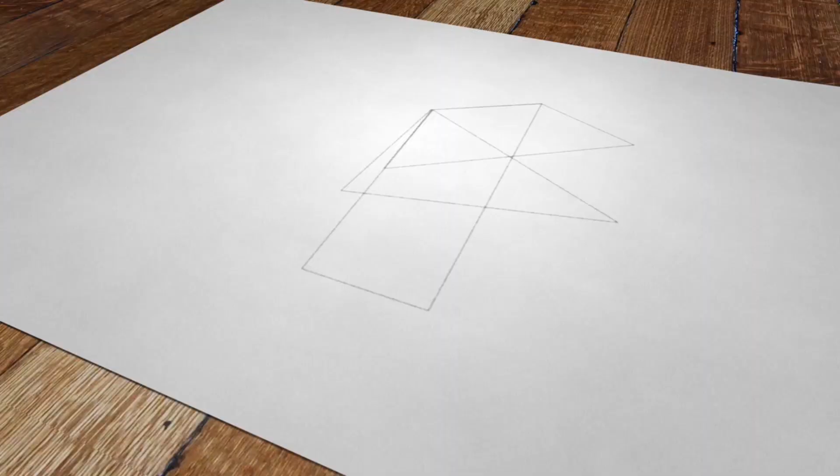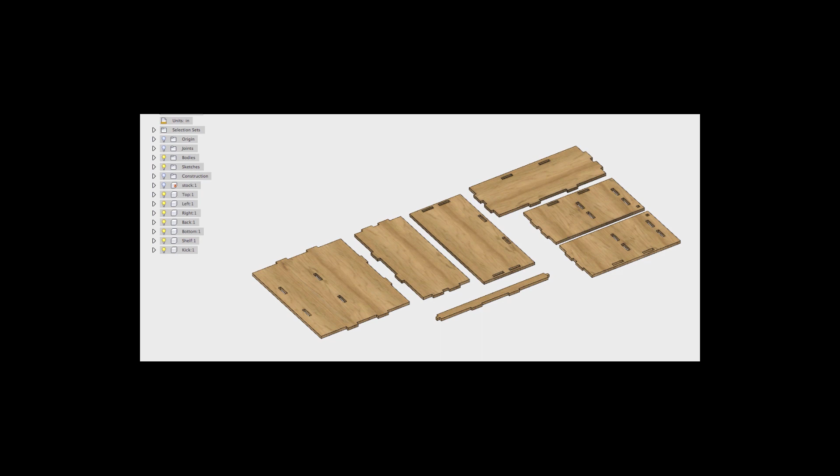Okay, in this tutorial, I'm going to take you guys through creating this bookshelf. We're going to start in Fusion 360 by creating some parameters, set up a sketch, and create a full 3D model. Then we'll show you how to take that 3D model and prepare it for manufacturing by laying all the parts out, putting on some dog bone fillets, setting up your CAM to create G-code, simulating that, loading it all up into the ShopBot, cutting it out, and finishing it up to create the final product.

So here in Fusion, when you start up, you're always in a new design. If you want to create a new design, you click File, New Design, and now you're in a completely empty project or part or assembly, or whatever you want to call it.

Before we do anything, for a project like this, I first want to create some parameters by pressing the little green plus. For example, the first one and most important is the ply thickness. Let's say I've measured that exactly at 0.725. We want to put this in, and we're going to use this all over the place so that as I develop the design, I'm always referencing this one parameter of ply. So if I go to rerun the job and I measure at 0.735 or whatever, each time I cut a new piece of material, I can adjust this one number, and all of the pockets and tabs and heights and everything else are going to adjust to accommodate the exact ply thickness I've defined.

I can also use this to define overall things, like if I wanted to make a configurable bookshelf. Let's say we wanted the height to be 26 inches, and we want to create a width of 30, or a depth of 14, etc. I can keep creating these parameters, and I'm going to use them all over the place.

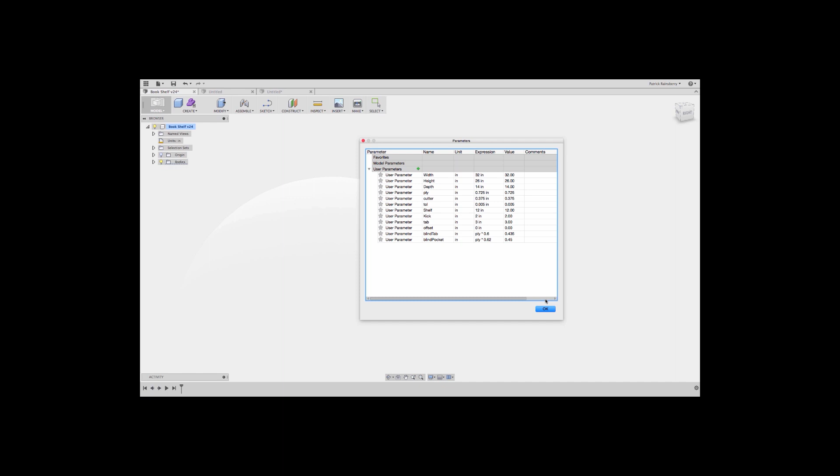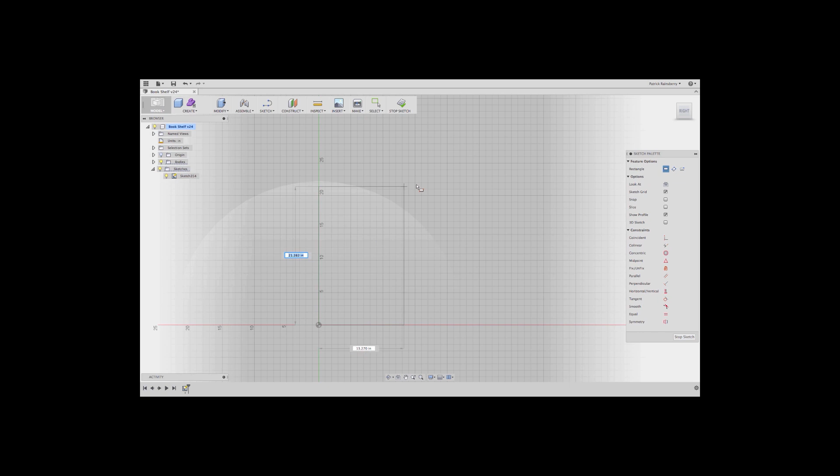Okay, so the first thing we want to do in this design is create a sketch to represent the profile of the bookshelf. I'm going to say sketch, create sketch. I'm going to sketch on the side profile face, and then we'll come in and start by creating a rectangle, and we'll draw this as just some arbitrary shape, and then we can give it a dimension.

So here we're going to leverage those parameters we created. Instead of typing in a number, I'm going to type in the word height, and then it's going to show me what that value is. Same here, depth.

Now I can come in and create some more rectangles, and these are going to define the different pieces. So like the top will have a shelf, we'll have a bottom shelf, have a little kick plate here, and then we'll have a piece along the back.

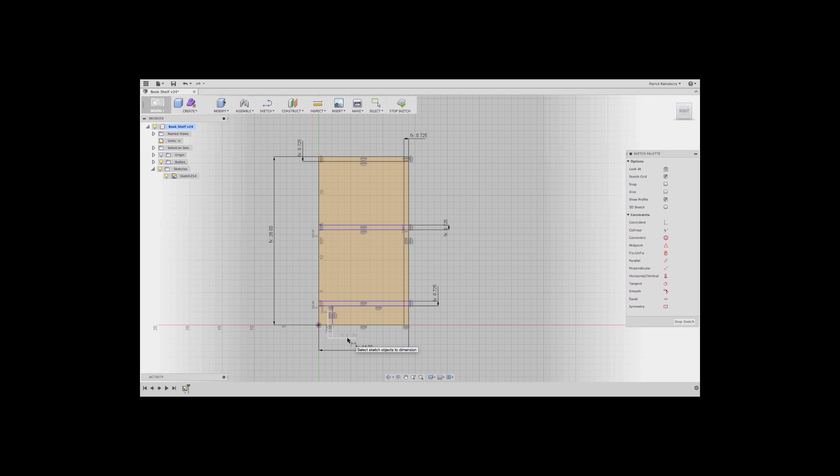And now it's just a matter of creating some more dimensions to define the sizes. So the thickness of all of these is going to be ply. This is one of the real advantages, by adding this parameter all over the place, we'll create these dimensions of ply, and then once you're ready to cut this and you measure your material very precisely, you just go in and change that parameter for ply, and all of this will update, and all your thicknesses and everything else will be up to date. Same if you decide you want to change the design.

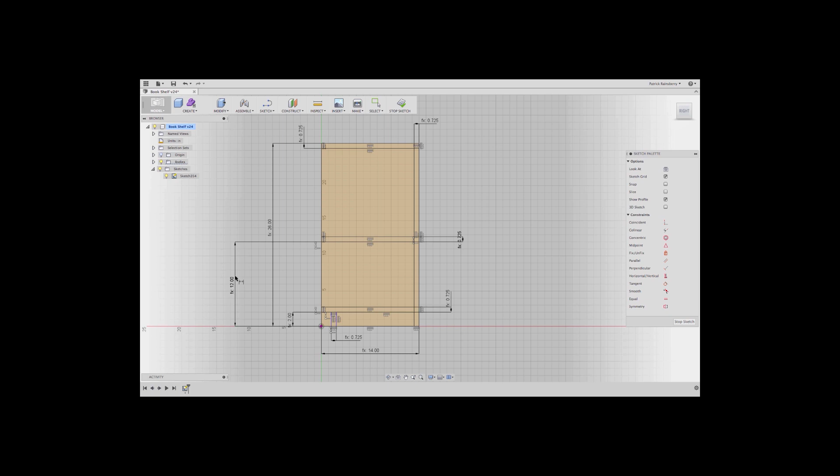We're going to just type in the word kick here. Again, we'll do up to here. We change this. This is called shelf. So if you ever want to change some of this stuff, you can just modify those parameters. If you do want to use a specific value, for example like this, maybe you just know that no matter what, that's always going to be fixed. We just always want that to be 1 inch. You can type in a regular number at any time in these dimensions as well. And now you've got your overall sketch profile defined.

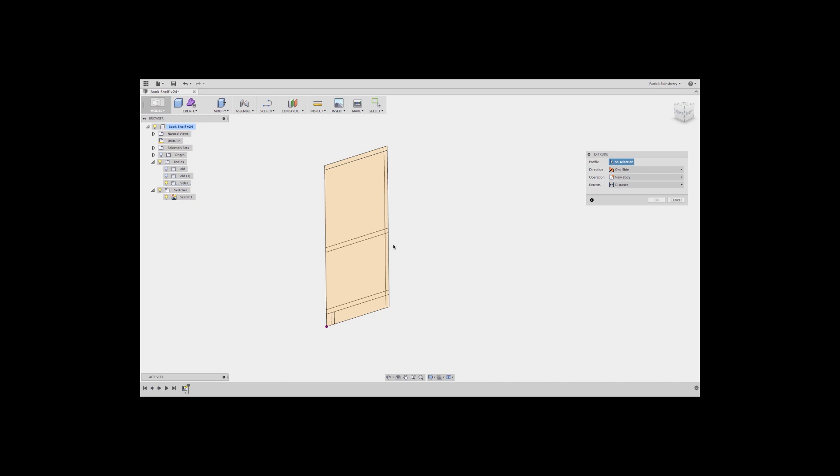Now that I have this sketch done, this kind of outlines all of the parts in the bookshelf. Now what I want to do is start creating individual components. So to do that, I'm going to create an extrude, and then I want to pick the sections of this sketch for the given part. In this case, I'm going to start by creating the top, so that's going to be that profile and that.

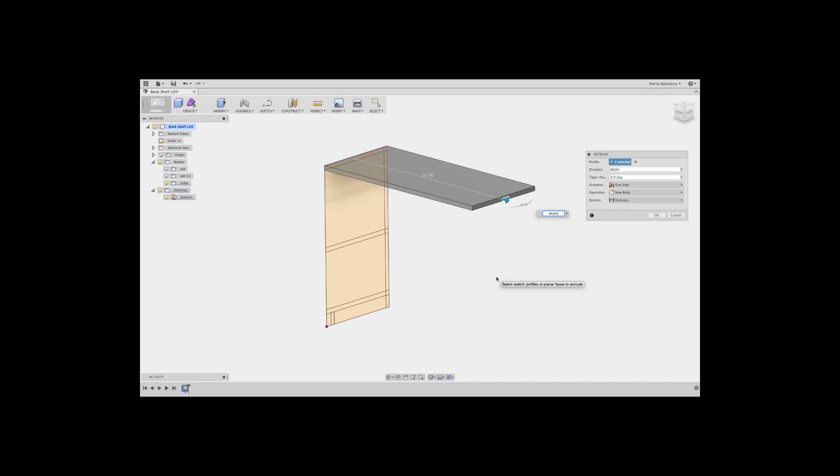So you should pick 2 things, and you can either just start dragging this out, but in our case we want to extrude this a specific value, and that is width. So that's going to be, again, a place where we're leveraging those parameters. You can do that here in the extrude commands as well. And when I do that, it's going to hide the sketch by default. So if you want to do something more with that sketch, you can always come back over here to your tree. In sketches, you'll see sketch 1.

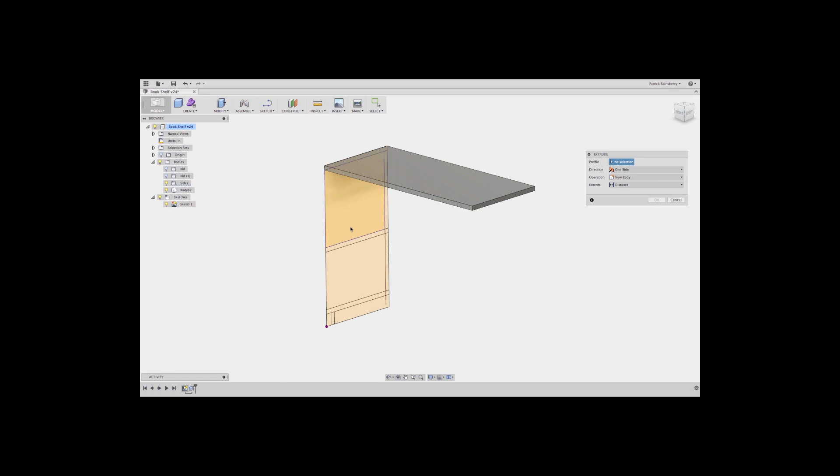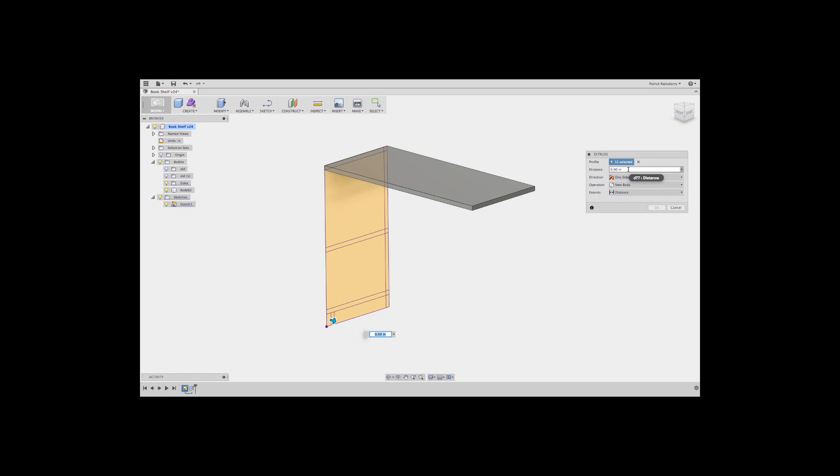You can show that, and we'll do it again because we want to create another piece here. So again, I'm going to say extrude, and here I'm going to create the side piece. Now this is going to be 1, 2, 3, 4, 5, 6, 7, 8, 9, 10, 11, and 12 sections. So again, this side represents all of those sections. You just need to make sure that you grab all the sections, and we want to say new body. For the distance here, this is where we're going to use that ply parameter to use our material thickness. Again, make sure the operation is set to new body. That's very important. And we'll say okay. And then we can hide this sketch if we don't need it right now.

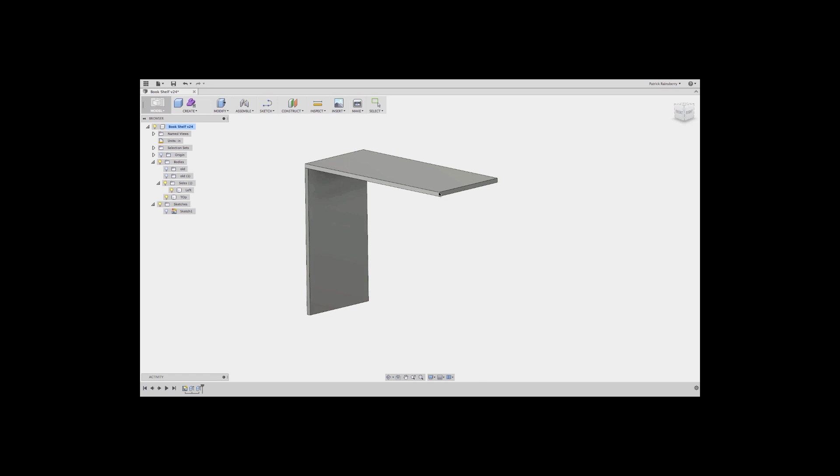Okay, now rather than re-sketch this, what I can do is take this side piece and mirror it. To do that, the first thing I need is a plane to mirror about. So we're going to use construct, and we're going to create what's called a midplane. What you do here is you basically pick, say, something like this face, and that is going to create a midplane right between it. So you can turn off all of your construction, or you can turn on and off this plane here. That is going to be a plane that I'm going to use quite a bit through the rest of this design.

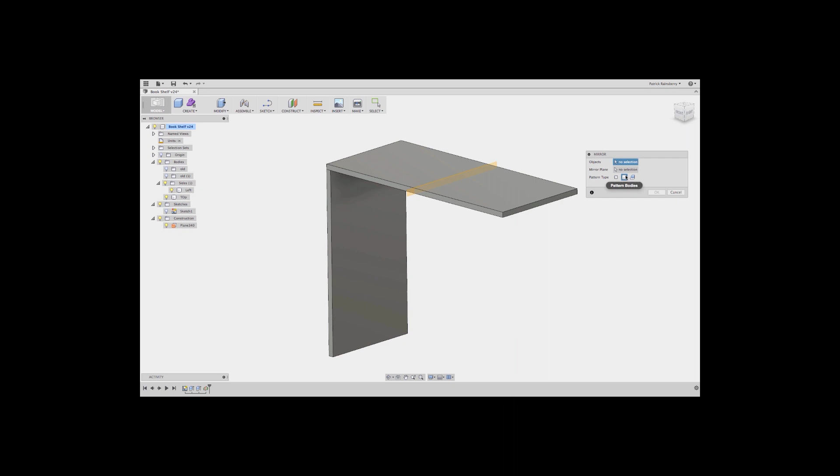And now create, mirror. I'm going to mirror, you want to select bodies in this case, so our pattern type is bodies, and our mirror plane is this one. And we've picked this body to mirror, and now we've got that part. So that's going to be a technique that I use throughout this, which is to basically create one body and then mirror it across this center plane to leverage it over on the other side.

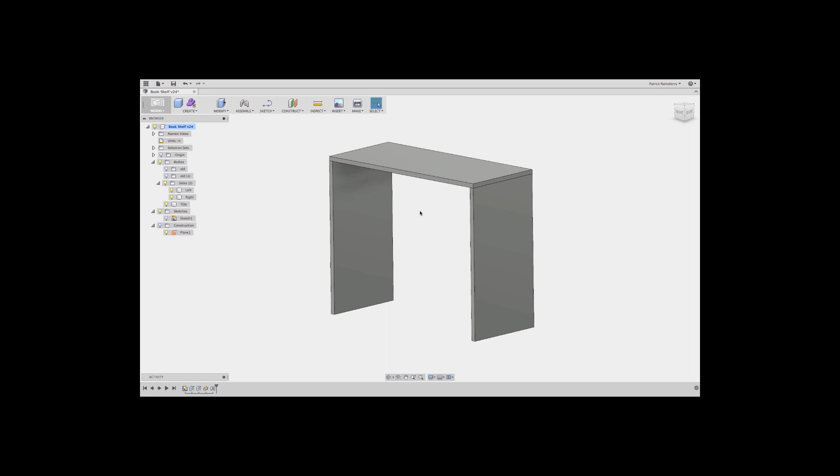So the next thing I need to do is create the shelves and the back piece that are going to go from this inside face to the other inside face. So we start features from this inside face instead of from where we originally sketched it. If you look, that sketch is actually on the outside, and we want to create some features from the inside. The easiest way to do this is to quickly create a new sketch on this inside face, and then let's just hide some of this stuff for a second.

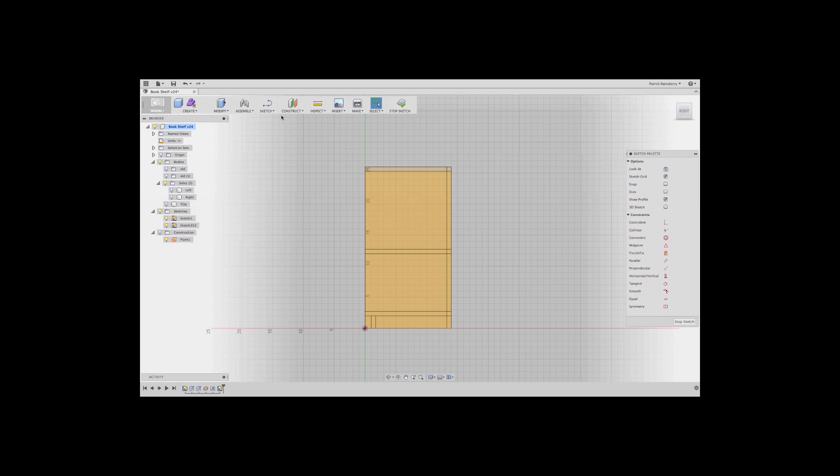I'm going to use the geometry from the first sketch. So project, include - what you're doing here is basically saying, I want to just grab a reference to all of these lines from the first sketch. That way, if anything changes in the first one, it'll be updated here.

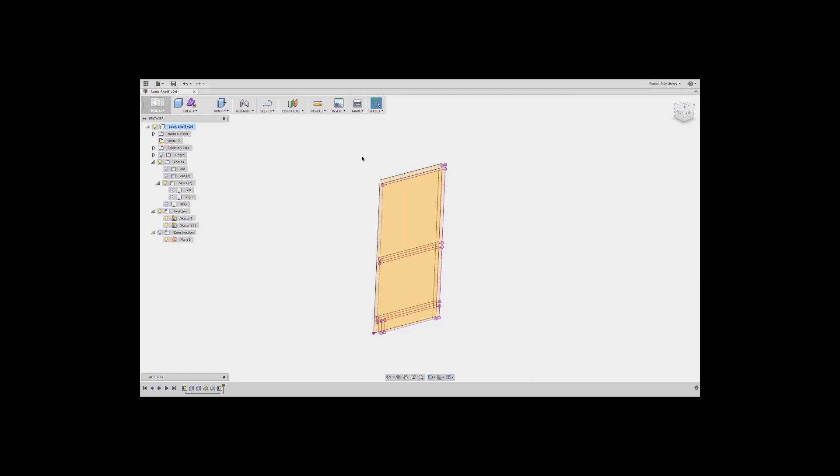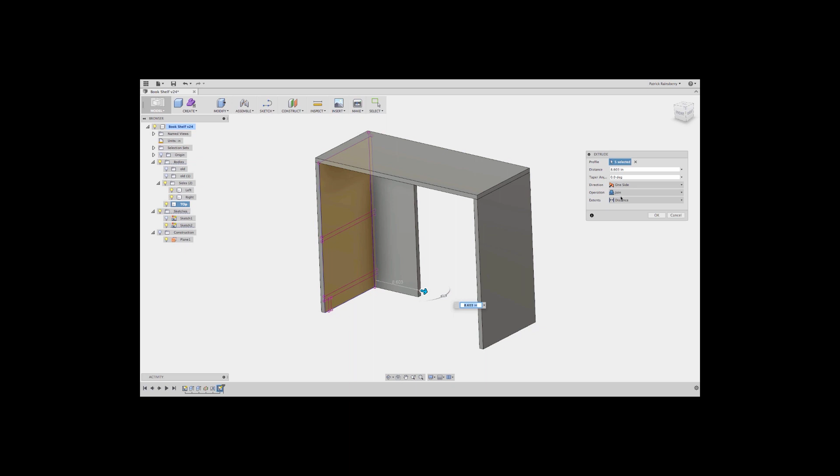And then we're going to use this new sketch to create some parts. So now we're going to use that sketch to create the rest of the components. Again, create an extrude, and here, rather than specifying a value, we're going to say we want to go up to the inside face. That way you don't even have to worry about figuring out what that depth is supposed to be. And instead of join, again, we want to use new body. Now we've created the back.

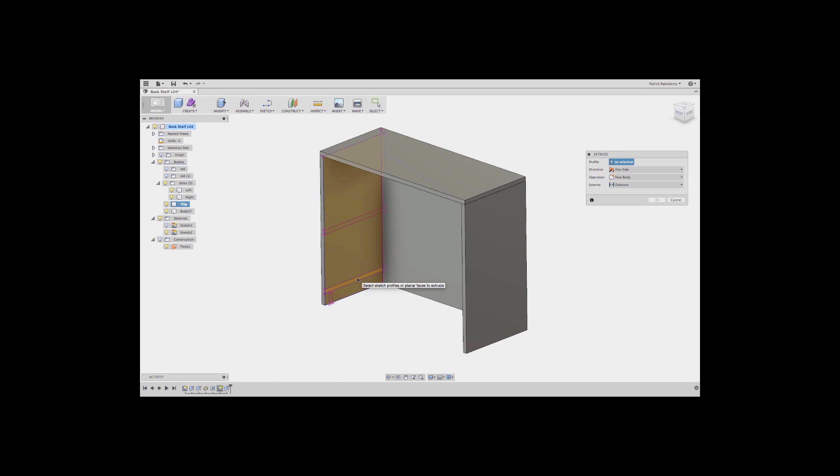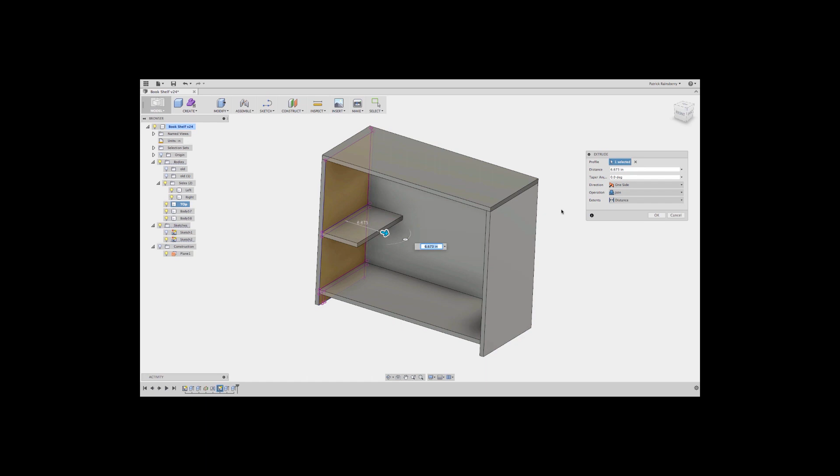Now we'll go ahead and just repeat that process. So create, extrude, and we'll pick this, which is our bottom shelf. And we will say we want to go up to this inside face, and it will be a new body. You can right click and drag up to repeat a command, which is kind of nice sometimes. So do that, say new body up to that face.

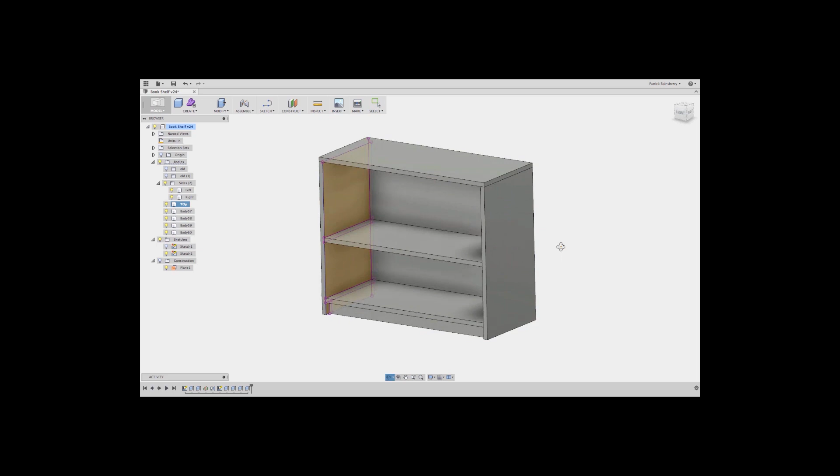And then again, down here, you can see the kick plate, and we'll go to that inside face. That looks good. Remember to always set it to new body, and we'll hit OK. Now you can hide that sketch.

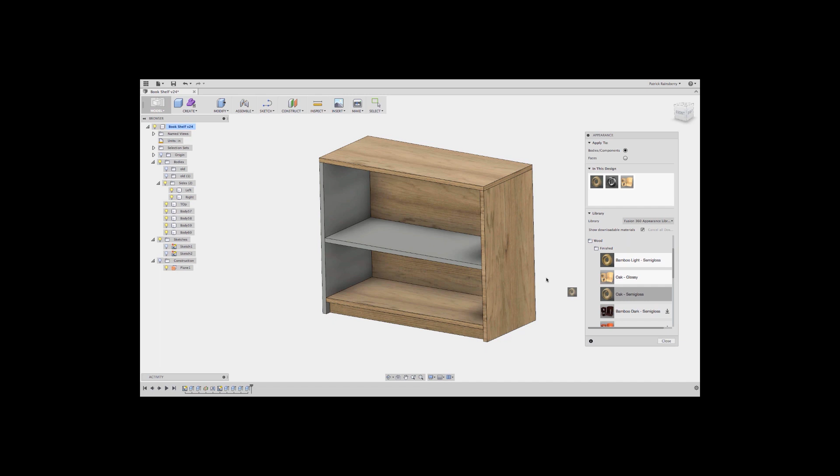Another thing that's nice to do here at this point is I'm going to apply an appearance. So again, I right click appearance, and you can browse into wood. You can see here I've got into wood finished, and I've got oak glossy, oak semi-gloss. Let's use oak semi-gloss, that looks pretty good. And you just drag this out onto your parts. Obviously this isn't a necessary step, but it looks pretty good when you're modeling and you're kind of looking at it the way it's going to look.

I like it. So now that we have the basic parts, I want to create some tabs so that we can create the press fit joints between all of these components. So I'm going to hide all of the parts except for the kick plate, and you do this easily by selecting on the light bulbs here in the tree.

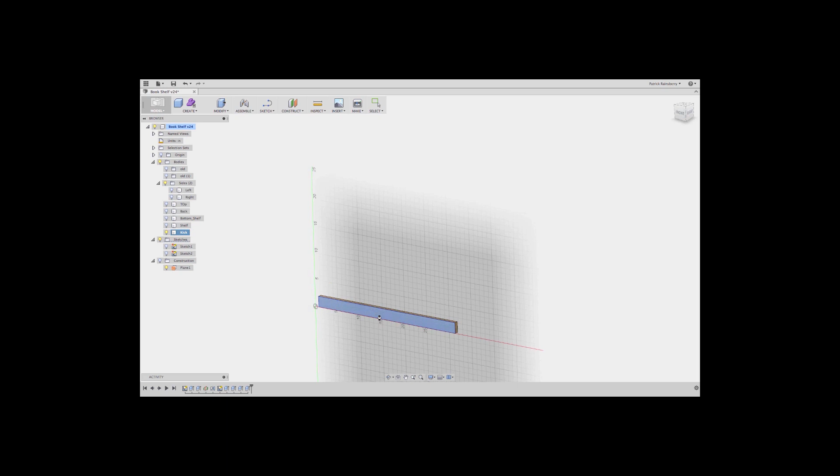Now I've got the kick, and I want to create a new sketch on the front face here. I'm going to go and grab my 2-point rectangle tool, and we'll just draw these two tabs in kind of a rough shape, and then we can go get the dimension tool.

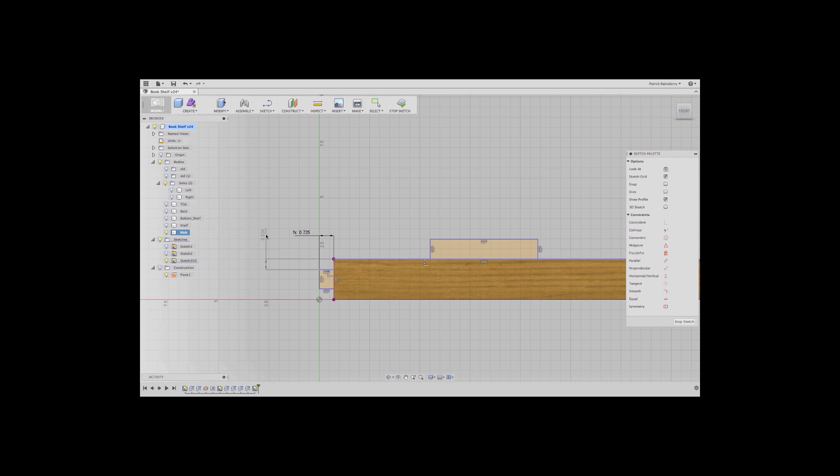So here I want the depth of this to be ply, so it's the ply thickness. Here's a nice thing we can do too, which is I can say, okay, I know that I have a parameter defined called kick, but I want this to be kick divided by 3. And then the same here, so we'll make the tab 1/3 of the depth. So if you change that kick parameter, this will all update. Over here, also ply and tab.

Another thing we can do that I use a lot is I'm going to create a quick construction line, so I'll create a line that just goes from that midpoint. You'll know you have the midpoint when you see that triangle. You can select the line, right click, say you want to make it construction. That way it's really just there for reference.

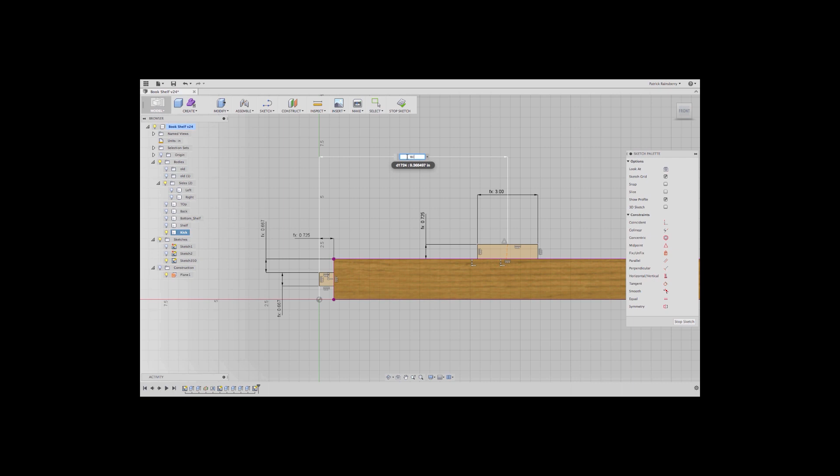Now I can quickly create a dimension from the origin, which remember this is going to represent the actual edge of the bookcase. This is inset by the thickness of the side. So we want to go from here to the center, and then we want this to be equal to the overall bookcase width over 3. And that should put us right where we want to be.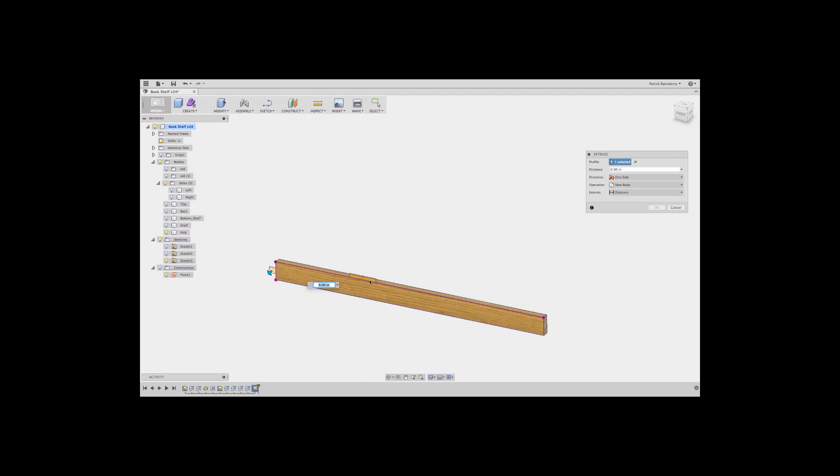Now we can use that sketch that we just created to create the tab. I'm going to create an extrude and pick the 2 profiles. Here I want to use the extents, setting this to 2 and going up to that back face. We'll go ahead and leave that as a join, just to show one way of doing this.

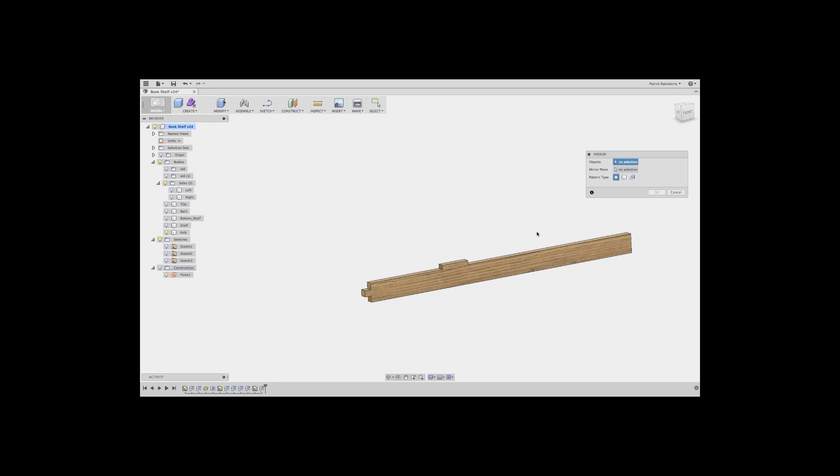Then I'm going to create a mirror. There are different choices here - I can either mirror faces or bodies. Next I'll show bodies, but in this step let's use faces so you can see the difference. With faces, I need to pick all of the faces of the component I want to mirror - it's a little more steps, so I'll pick those 3 faces. Then for the mirror plane, we'll use that mirror plane we created, and we get the result we're looking for.

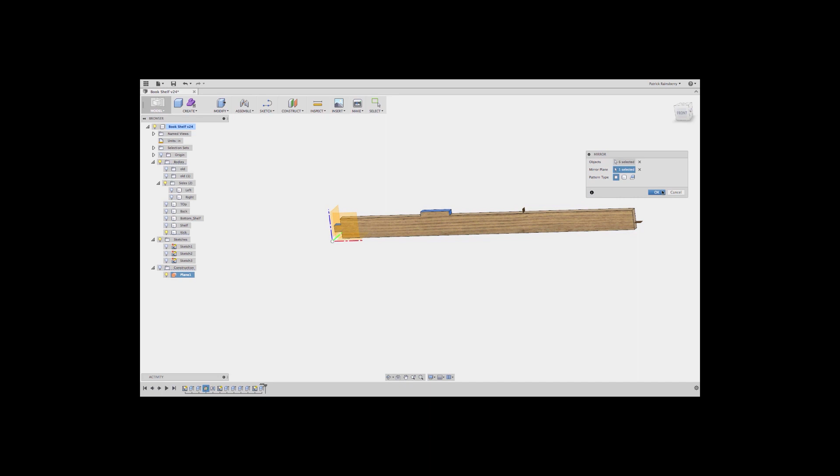Okay, so now let's create a sketch for the tabs on this shelf. Sketch, create sketch - I'm going to pick this face. And now we're going to create just the tabs on one side.

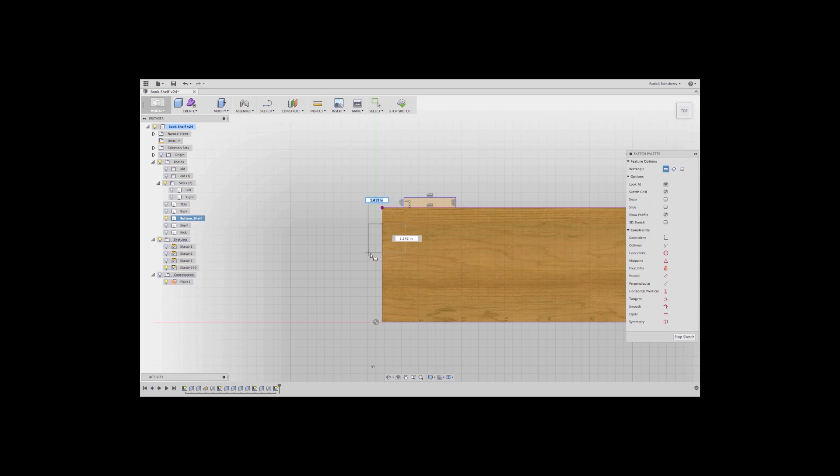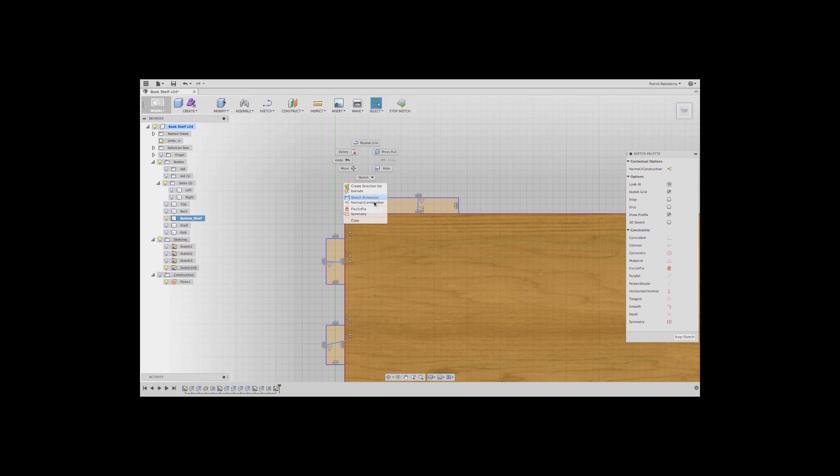And again, we'll create lines for the midpoint. I do this because it gives me a nice way to create a dimension to the midpoint of these rectangles - they don't really have to be straight or anything. Then pick them, right click, construction. Those are just some reference lines to give you that reference point at the center. It's not necessary, but I just do it out of habit.

Now we'll create some dimensions, so we can again leverage our parameters. The width is going to be tab, tab, tab, and then the height of all of these tabs is going to be equal to the thickness of our ply. Remember, the point of this is that if I measure my actual material thickness and go modify that parameter ply, all of these tabs will adjust as well. So you're always going to have a nice perfect fit when you do it this way.

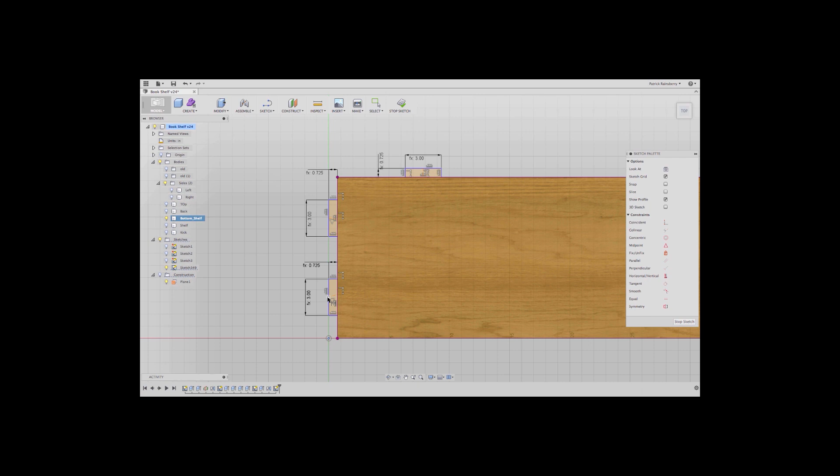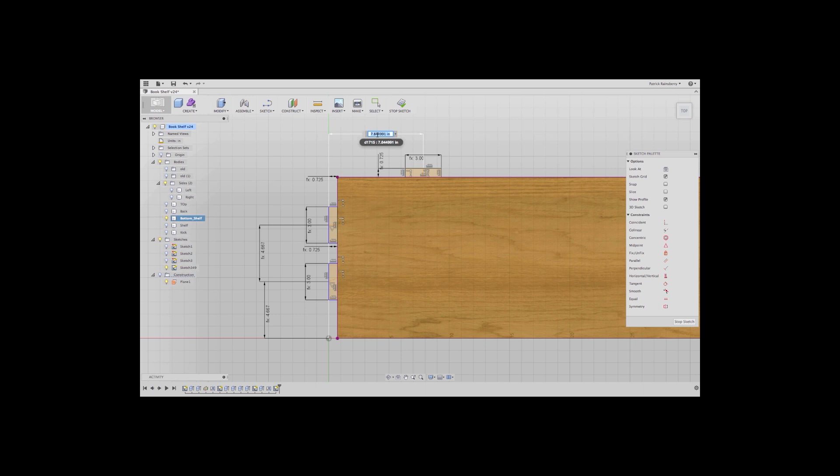We'll also take advantage of our other parameters here. This is going to be depth over 3. This one will be depth over 3. And then here, again, you want to make sure you're going from the edge over to the center of that, not from the edge of the shelf. We'll call this one width over 3. That should give us the sketch we need to create these 3 tabs.

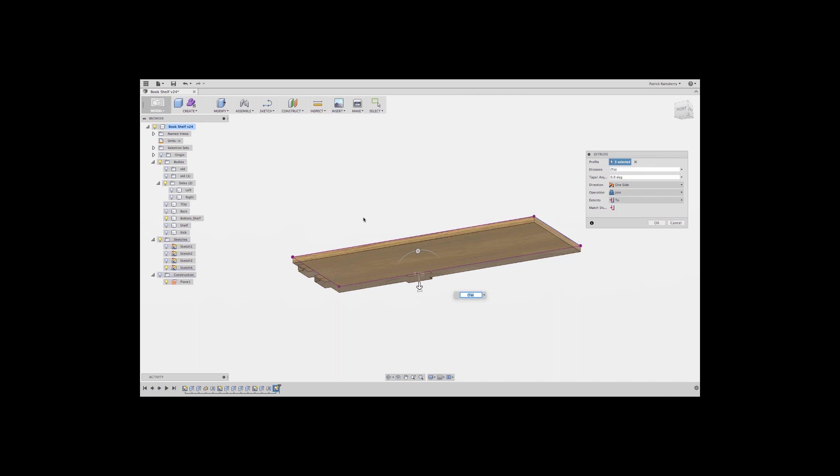Now we can create an extrude for these tabs. So grab the tabs, again distance up to that face. But we want to make these new bodies because we're going to leverage just creating these 3 and then mirroring them around.

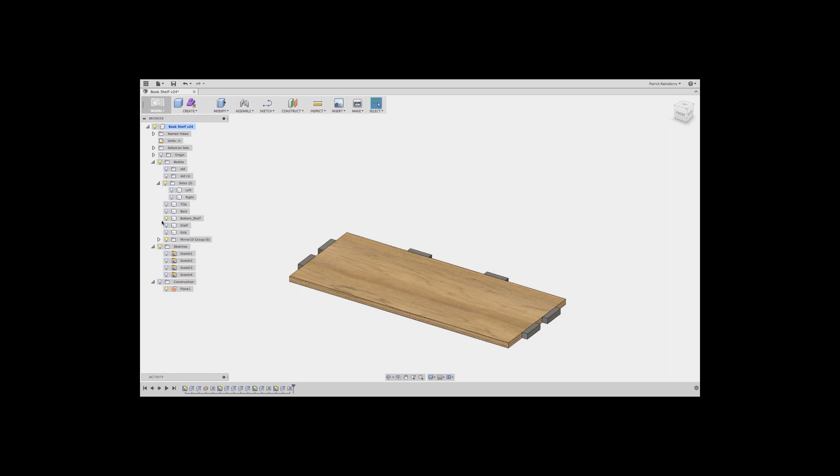So we'll take those 3, then create a mirror of them - grab the 3 bodies and mirror them around our construction plane here. Now we've got these up. Let's go ahead and leverage that for the shelf as well, since we want the same exact tab pattern on that shelf. The first thing I'll do is quickly create a mid plane between that face and that face, which gives me this plane here. You can turn these on if you want.

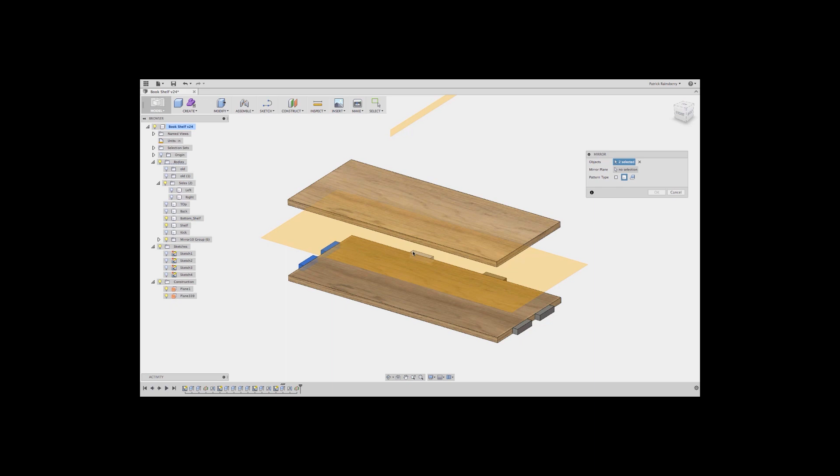Then we can create a mirror - this time we'll grab all 6 of these, and mirror it about that new mid plane I just created. Say OK, turn the view of that off. Again, light bulbs turn things on and off.

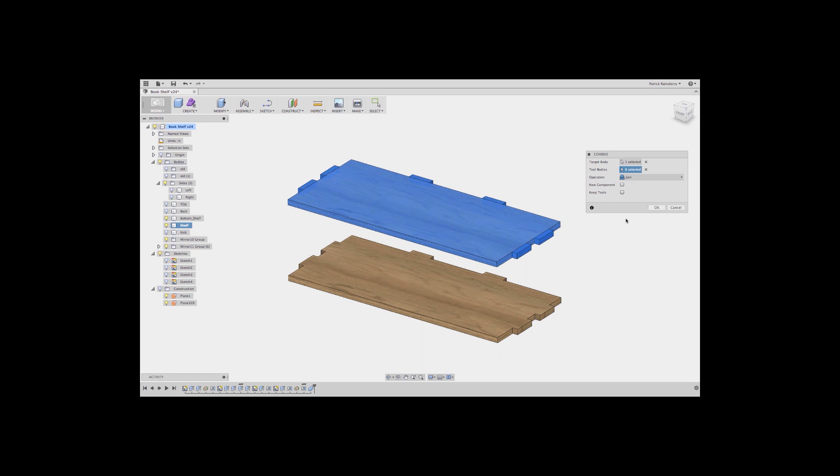And I'm going to use my combine feature - set the target, and then all of these are the tools. Join, don't want to keep the tools. Now we've got that part that we want. Do the same thing here - this is why I like to make these tabs as individual bodies. Sometimes it's really just super convenient to mirror them around, copy them, and then combine them later. It saves you a lot of work in the long run.

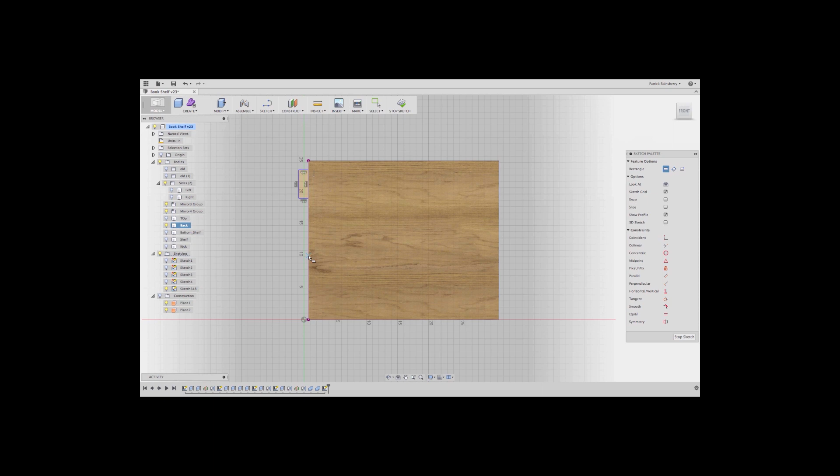Okay, let's create the sketch for the tabs on the back. Again, we'll create the sketch here. Sometimes you might want to rotate around so you're looking at this from the front to get the right perspective. We'll create our rectangles, just drawing these in an arbitrary place to start with, and then make my reference to the midpoint just to make it easier to dimension later.

And then we'll make these construction. So right click, construction. And now we'll create dimensions, leveraging all of those parameters. So the width of tab for all of these, and then the depth on these sides is ply.

So we want to just have that go all the way through the thickness of our material. And then on the top, this is going to go into one of the blind pockets, so we'll call this one blind tab.

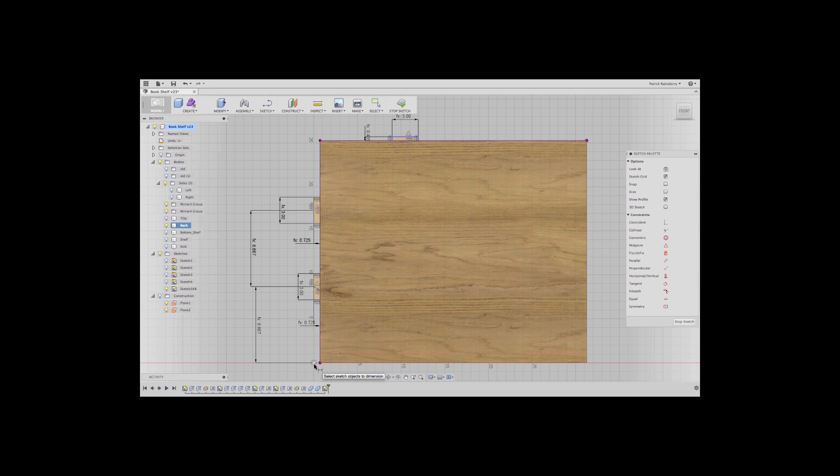And then for the position, we'll go from here to the center. We want that to be height over 3. Center to center will also be height over 3. And then here, we just want to measure from the actual 0 point, not from this inside edge. We really want the outside edge of the whole bookshelf to this point to be width over 3.

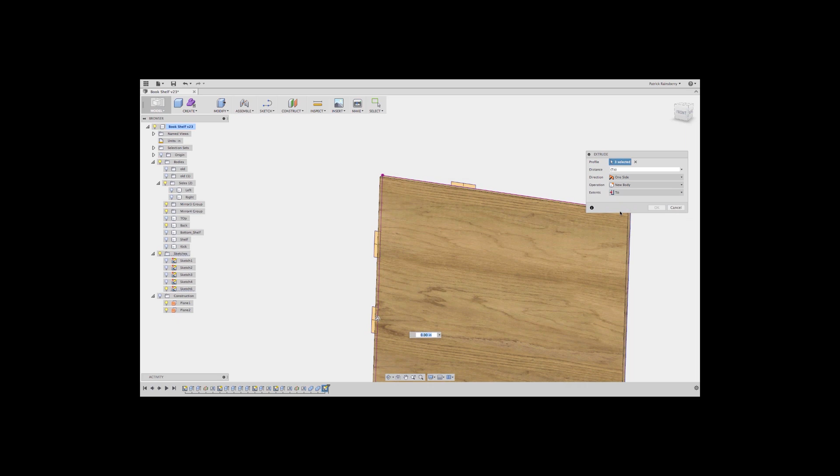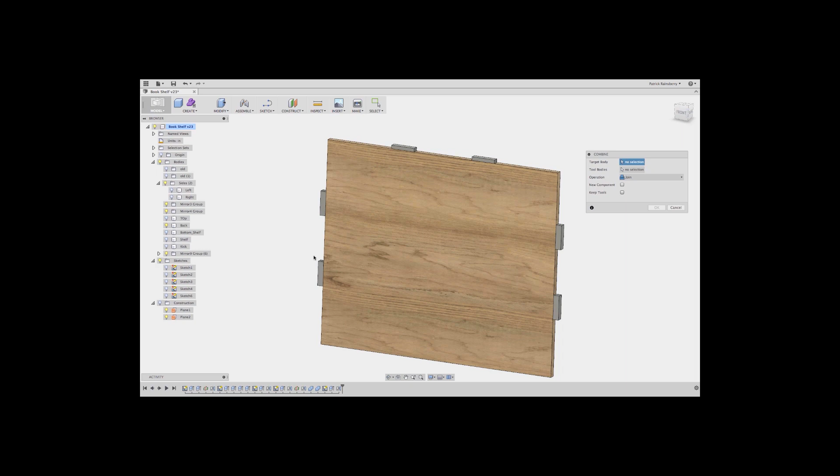And there we go. All right, again, just take these, create an extrude of the 3 tabs to the inside face, create new body. This way we can, again, mirror those 3 tabs about that initial mirror plane, and then do the combine.

Okay, so let's create a sketch for the tabs on the top of the side. So create a sketch on this face back here. We'll create 2 rectangles.

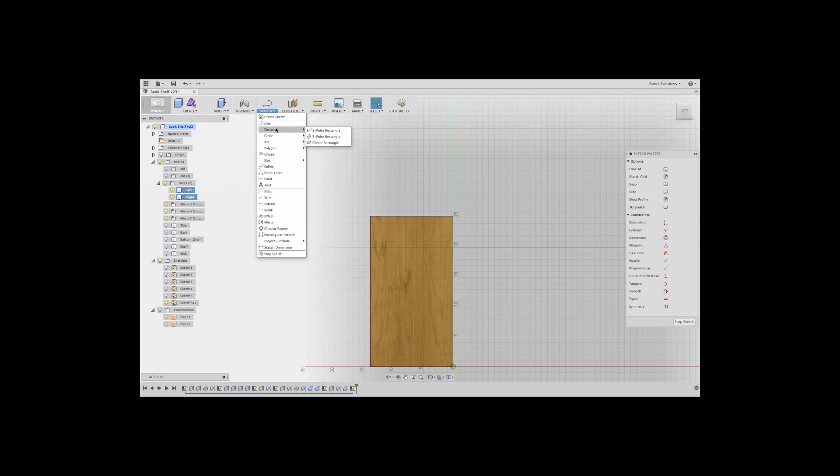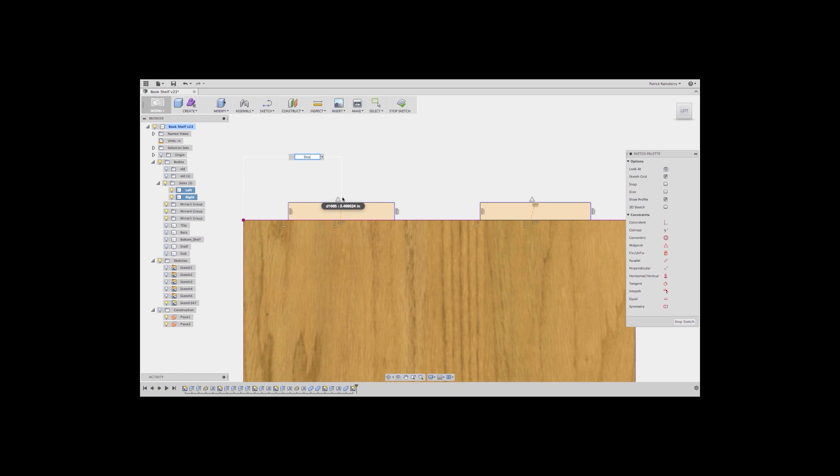And again, we'll create dimensions, all of the dimensions that we need. This is going to be depth over 3. And then we'll just create the rest of the dimensions real quick.

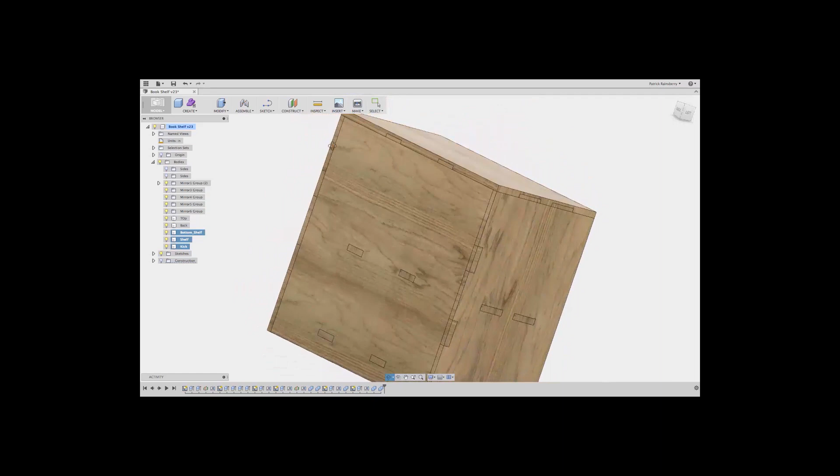So now you can see there's a little bit of a problem where we've got the tabs coming right to the edge of the top piece. So we really need to make a little bit of a lip to be able to have room for a pocket. So rather than try to refigure out where that could be in the design, changing sketch planes or anything like that...

All I'm going to do is come in here and say modify, press pull, and now I can just grab these faces, pull them out. We'll just go like 1/2 inch, and that'll just give me a little bit of a lip to create room for a pocket.

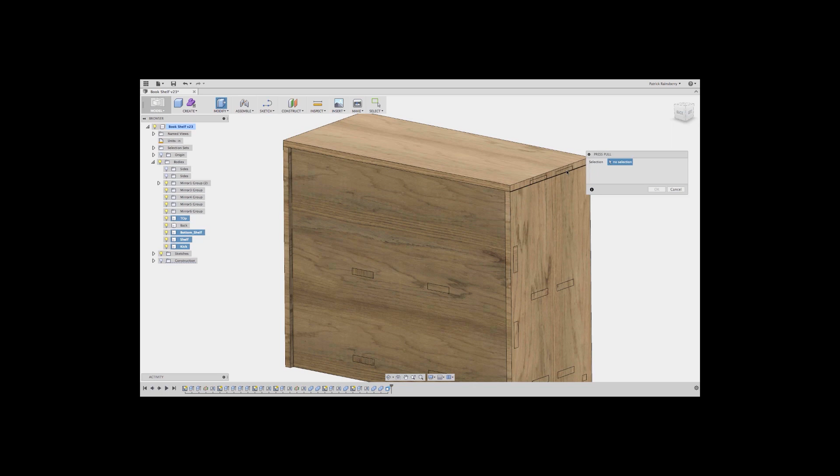You can repeat that. Grab this face, move it out 1/2 inch, and then the same thing over here.

And now we've got a nice design. Note that the width and the depth now would be off, so the width would be actually 1 inch longer than we've originally defined. If you want, you could go back and modify the parameters, make a different equation, whatever. For now, I'm just going to leave it.

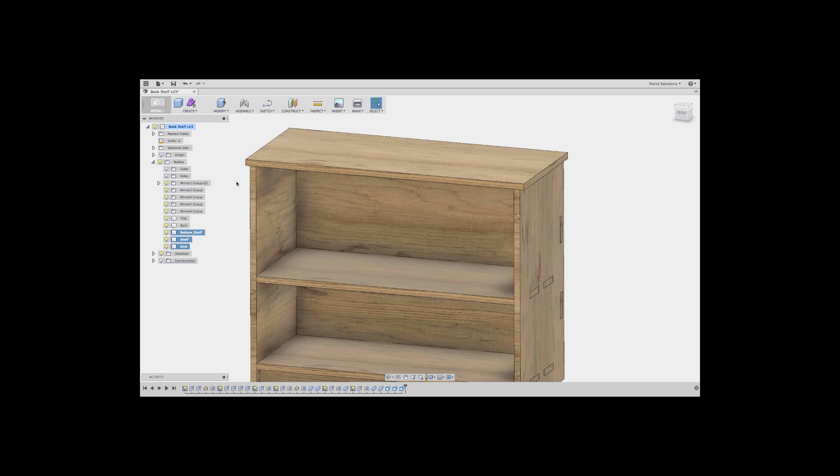Now we want to create the cutouts for all of these tabs. We're going to do that with the combine feature. So with combine, I can pick the part that I want to cut. The tool is going to be this kick, so basically I'm going to use the tabs in the kick to cut the pockets out of this bottom shelf. And we're going to say keep tools because we want to keep the part after it's done.

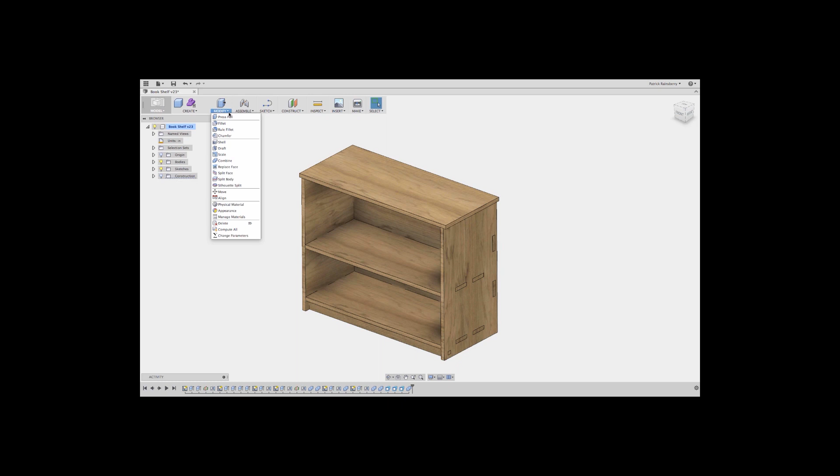Again, repeating that, combine. Let's say we want to cut out the back, and the back has pockets for the 2 shelves tabs, so the 2 shelves are going to cut the back.

Do it again. Now we're going to cut, if we want to cut one of these sides. So we're going to cut the side, and all the parts that we need to use to cut the side that have tabs that intersect it are all of these. So say OK.

Can repeat that again, cut the right side, and again we'll pick all of the parts that are going to cut it. And then finally, one more time, pick the top, and we'll cut that with this part, and this part.

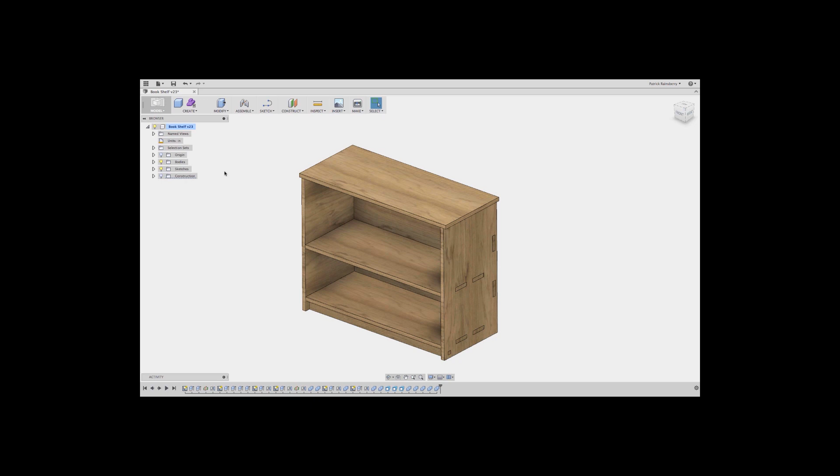So now, for example, if you look at one of these, if we were to hide some of these parts, you can see now that the sides have all of the pockets cut out.